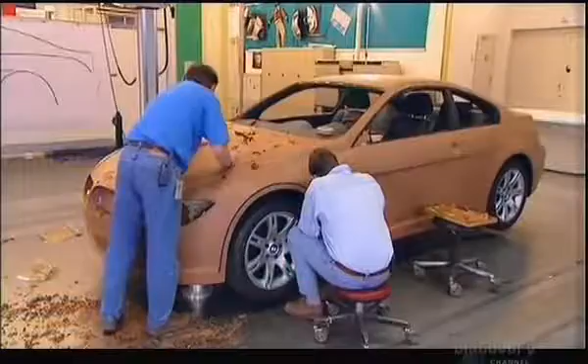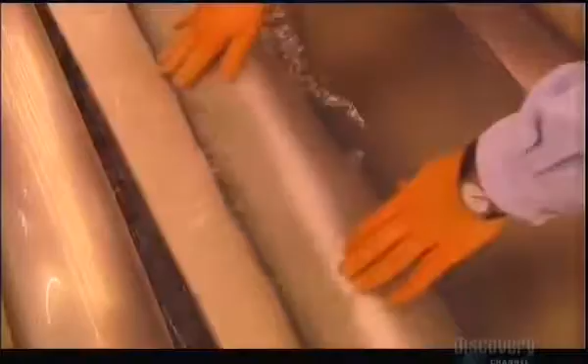After careful sculpting, skin-tight sheets are added. The model makers have to work very carefully. The sheeting tears easily. When they're through, the car will look real. Clay and plastic will seem like glass and steel.

This is the shape of a billion-dollar gamble. This is the car BMW is counting on.

While Adrian van Hooydonk designed the exterior of the car, it's now the job of Boyke Boyer to push it through to completion.

When you're chosen to make a car like this, you naturally have a lot of sleepless nights. You want to create a real highlight, something genuinely special. And you know that you'll probably never get another chance like this.

Boyer is one of BMW's most experienced designers. Even for him, this new car is an enormous challenge. The pressure is immense.

Naturally, you're very highly motivated and say to yourself, we need this kind of car. You'd like it to be a success, and your team wants the same thing. And then you start to hear the first comments: is that really necessary? And then you're not quite so sure of yourself. Am I doing the right thing? Maybe it should have a completely different look. But you can't play around with all the possibilities because there is such a tight time schedule.

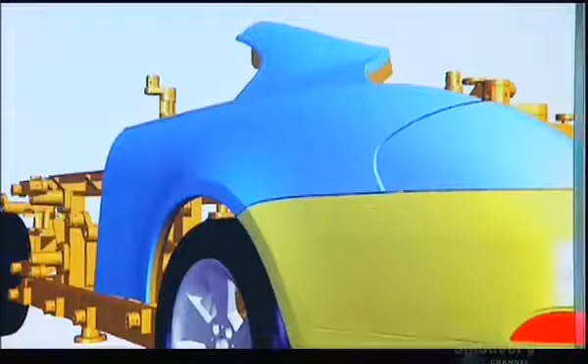But it's not full-bore production yet. There are still changes to be made. Still hidden are tiny mistakes that haven't been found.

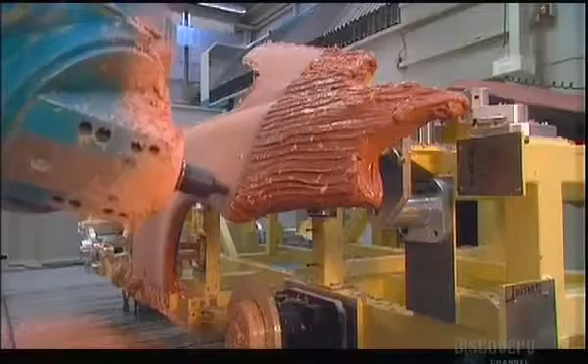All eyes turn now to the inside of the car, especially the dashboard. It's one of the most complicated parts of the car. Like the exterior, the designers need a full-scale model to examine. It takes weeks, but the dashboard is finally ready.

Here, mere millimeters count. It's a mix of art and function. If it looks good, but it's hard to use, the design will be scrapped.

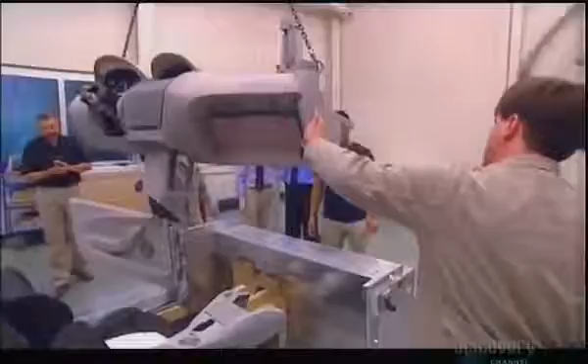It's a struggle for Dave Carp, who designed the interior. But it's also a moment of opportunity. For the first time, he sits inside the car he dreamed up.

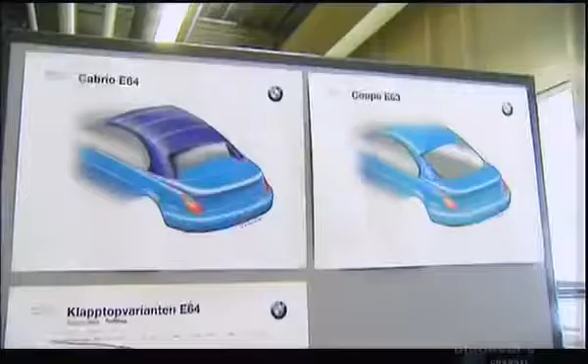BMW has decided to make both a hardtop and a convertible version of this model, calling one the E63 and the other the E64.

Today, they're deciding whether the convertible roof should be made of fabric or steel. Hardtop roofs that can fold back out of sight are very popular. But a fabric roof will make the car lighter and create more room in the trunk.

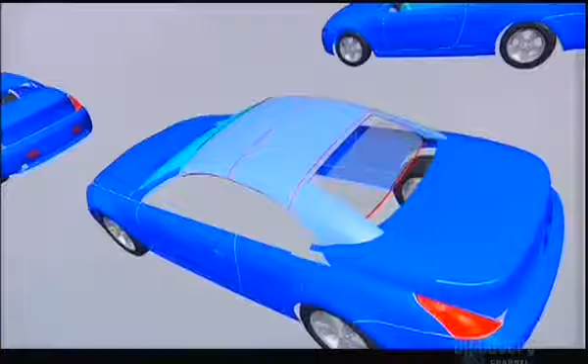To help the designers make the decision, 5 different models have been created in the computer: the basic hardtop model, then convertibles with various hardtop roofs, and finally, a convertible with a fabric roof.

With the roof up, it doesn't look like a convertible at all. The fabric roof eventually gets the nod, but it will be a new kind of fabric.

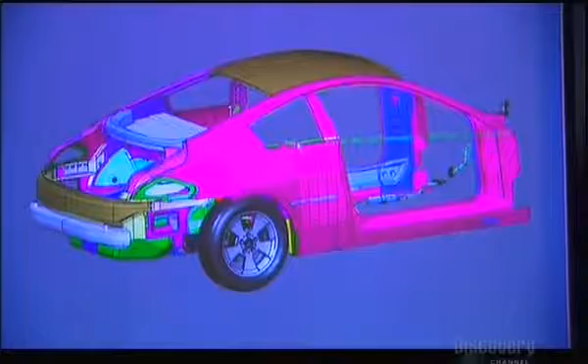With this many cooks stirring the pot, conflicts are inevitable. Even with the fabric roof, the design of the rear of the car hasn't left enough room for the battery. It's a classic conflict between the needs of design and the demands of engineering.

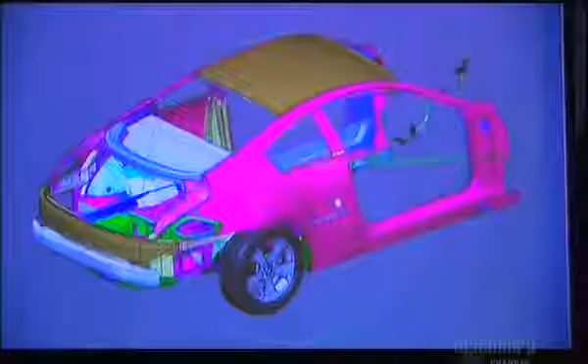Changes are coming. The designers don't want to budge, but the engineers are firm. Both sides try to find a solution.

With the exterior and interior gradually taking shape, it's time for Annette Baumeister and her team to start working. It's her job to add a dash of style and elegance to the car. A feeling of luxury will make it easier to sell.

As the designer responsible for colors and materials, I draw my inspiration from museums and galleries. And then naturally we go into the stores and look at consumer goods. There we get ideas about the ways materials can be used and how they can be combined.

You need a really good antenna to pick up all the stylistic vibes in the air, and you need a good imagination to turn these vibes into something real. But we also draw inspiration from classic cars. What did people use back in those days? Are there interesting materials? What actually is an automobile? You don't have to reinvent the wheel every time. You just have to see things in a different light and combine them in new ways. You need a good nose for things like that.

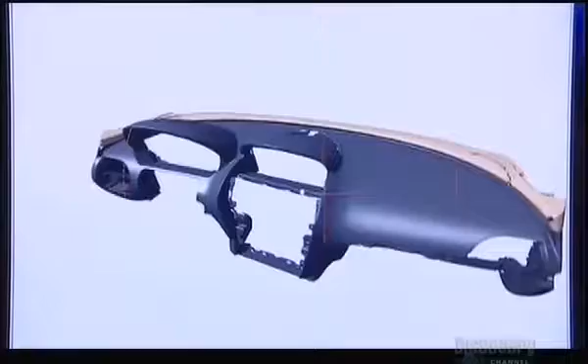She has a major problem with designer Dave Carp. He wants a beige strip to flow across the top of the dashboard. It's an idea that poses a serious problem. In bright sunshine, it would reflect in the windshield, making it difficult to see.

The beige strip has to go. Dave Carp will have to live with it.

Once he saw the model, complete with the color he chose, it was clear he had to change, and he knew it. So the best thing to do is to find a compromise where I can give the effect that the lines are all continuous and dynamic. We don't want to make a design which annoys people. It's supposed to be harmonious and beautiful.

We made this model. We put in a windshield. We tested it with different kinds of colors here to see what would be reflecting. And yes, there would have been a problem. So we made this color break here. In the end, it turned out it had to be reduced even more to make sure that the driver absolutely would have no problem with it. But I think we're happy with the result.

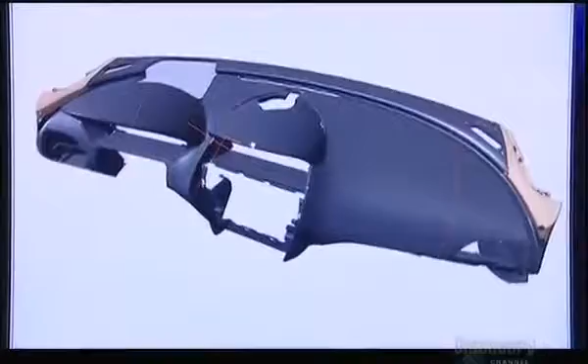Well, I'd like to take a look at the color break near the A-pillar here in the instrument panel. Karp shows the compromise to Chris Bangle, head of design.

Oh, it looks nice. Great. You like it? Yeah, this was it, huh? Yep. You know, we got normally on the darker colors, this band runs all the way through here. Yeah. On the lighter colors, we had to break it to avoid the reflections. Well, that was kind of pre-seeing, right? Reflections. Right. We want to avoid any annoying reflections in the windshield. Okay, but in the dark colors it runs. Yeah, no, but still you get the whole effect. That's the point. Yeah, that's the point. I mean, that's pretty. Okay. That's nice. So you can live with that. Yeah. There's a dark shadow under it, you know, here, the break here right in front of the top runs through, and I think that's nice. Yeah. Okay, good. No, we normally have that right now.

In a special room, more choices are being made about the car's interior. Various colors of fabric and leather are examined under different lighting conditions. Something that looks fantastic in bright sunshine can seem depressing on a rainy day, then great again under artificial light. Choosing exactly the right colors will be critical to success.

But the quest for ultimate comfort goes far beyond picking the right colors. Engineers make a computer model of a person, then add that to the design of the car. Will drivers feel comfortable? Can they reach the controls? Will they be able to drink their coffee?

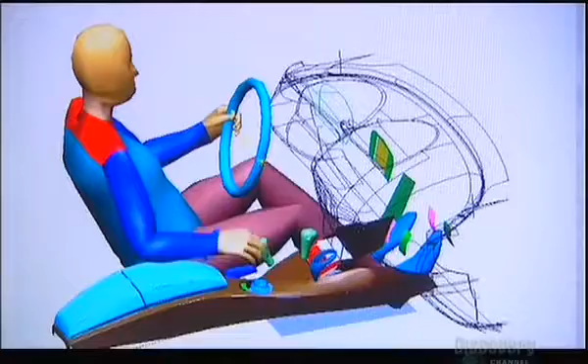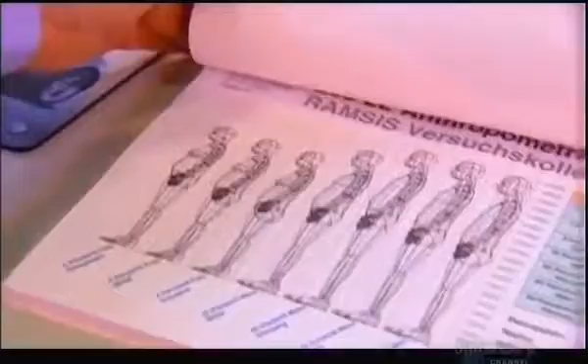The computer is necessary so that we can check as much as possible using simulation. Now we have to take into consideration the fact that people come in different sizes. Our data bank provides for 90% of all human sizes. Only the largest and smallest 5% aren't included.

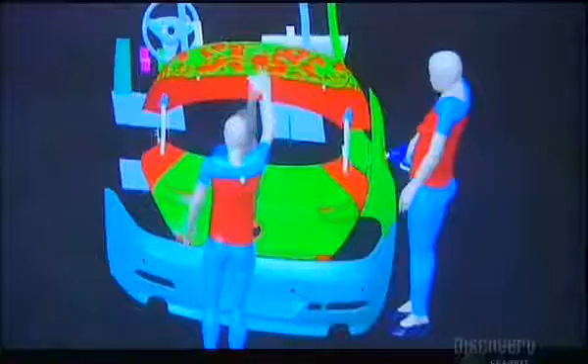But ergonomics can make life easier for the vast majority of drivers. And that's what really fascinates us about ergonomics. We defend the customer's interests and can really make their lives easier. Everything has to be located intelligently and be easily accessible, whether you're closing the trunk, filling the tank, or shifting.

A focus of concern is the central console. The designers have crammed a lot into this tiny space. Next to the gear shift and the handbrake, there's a cup holder, a telephone, and space for storage. Tiny changes are made to make the console easier to use.

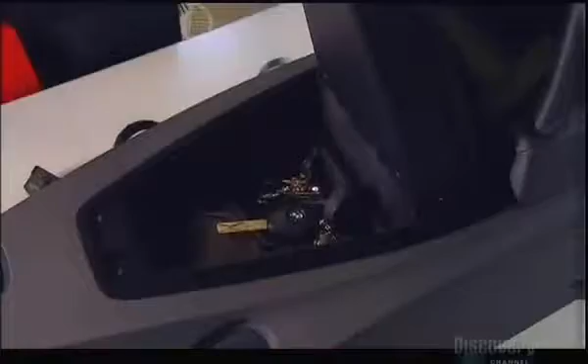To test these changes, the interior of the car goes for a ride. The models of the dashboard and console are placed inside a test car. Every time the driver moves or uses a control, it gets recorded by 4 cameras. The driver is also observed by an engineer who's tagging along. If even the slightest problem turns up, the team gets to work eliminating it.

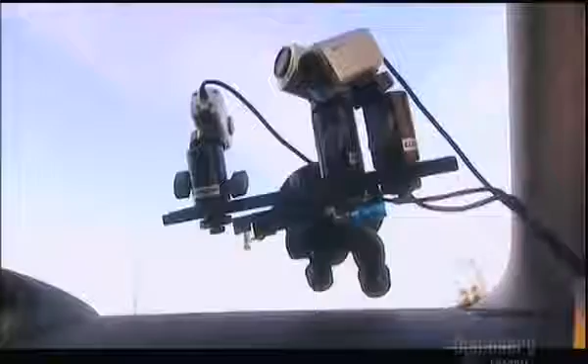At the same time, another engineering team has found an enormous mistake, one which will mean changing the very look of the car.

BMW is betting millions of dollars on a brand new sports car. They want it on the road soon. But after months of design and approval from the board of directors, a serious flaw has just been uncovered.

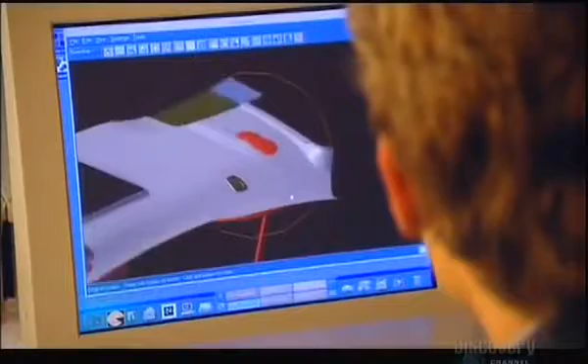At BMW headquarters in Munich, designers have continued to tinker with the look of the car's roof. What they thought were tiny changes have had a dramatic result. Two red shells simulate the heads of passengers in the back seat.